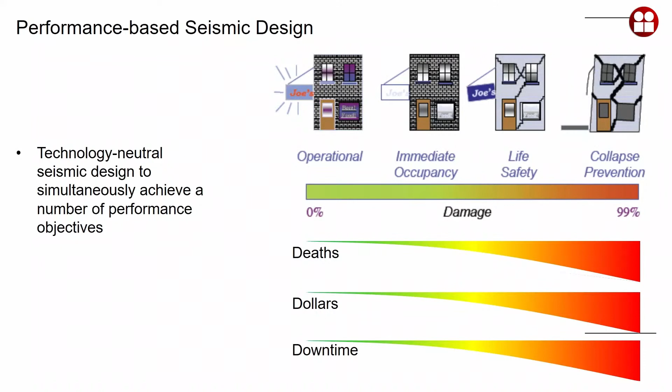And the downtime of the facilities that happens after an earthquake, depending on the amount of damage that we have seen.

And this Vision 2000 format of multiple performance objectives associated with a hazard level, frequent, expected, design level, or rare, with the performance objectives that are...

Here only four of them, in terms of operational, immediate occupancy, life safety, and collapse prevention, has taken hold in much of the prototypical performance-based design provisions.

And the ones that are now being implemented, perhaps there are one limit state fewer and one hazard level fewer, but this is how things have gone in the past.

And we are in the situation now that when we design, we look still at the demand and capacity comparison. We take input in terms of limit states, in terms of hazard.

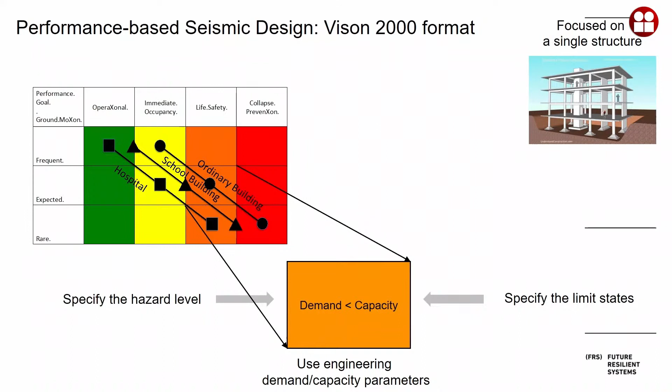We use engineering demand parameters. These are drifts or forces to evaluate the structure and figure out if it's good or not, and then iterate also in the design process.

PEER, the Pacific Earthquake Engineering Research Center, where I happened to work in the early 2000s when the center was going strong, developed this performance-based earthquake engineering framework that has to do with dividing the problem of computing the total probability of a loss into several stages using the total probability theorem.

The first stage is, of course, the hazard. Then we have to do some structural analysis, figure out what is the consequential amount of drift or force in the structure. Based on that and some test experience, or really good models, we do damage analysis and assess the damage state of the structure. When we are done with that, we can figure out how much it costs or if anybody is going to die, if there's going to be a collapse or not.

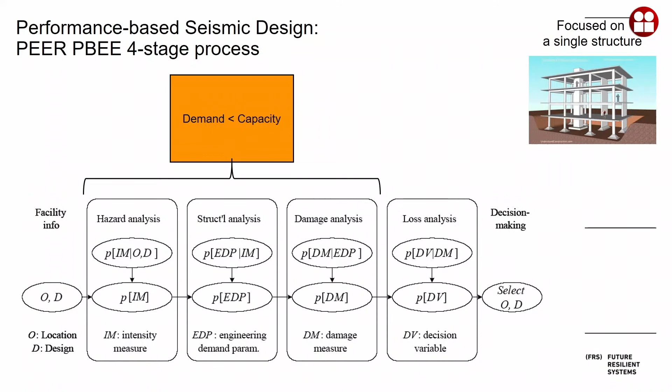This kind of 4-stage process has also been accepted in our profession and is entering ASCE 7, the modern codes, the FEMA P-58 entire system of manuals has been built around this idea. The more modern retrofit codes like ASCE 41 or the Swiss 269 are also looking into this idea and accepting it.

Why is that so? Because it works. It's easy to choose examples in Mexico City because there are earthquakes, big ones. Comparing 1985 and 2017, there were collapses in both, but many, many more in 1985. So many more people died.

The changes in the code that Professor Alcocer also wrote about, and the evolution of the code in terms of the spectrum shape, in terms of the requirement for thicknesses and strengths, have shown to work. They don't prevent collapses completely. Probabilistically, that's a little hard to do given the uncertainties we have, but they make them fewer, so we don't have as many casualties.

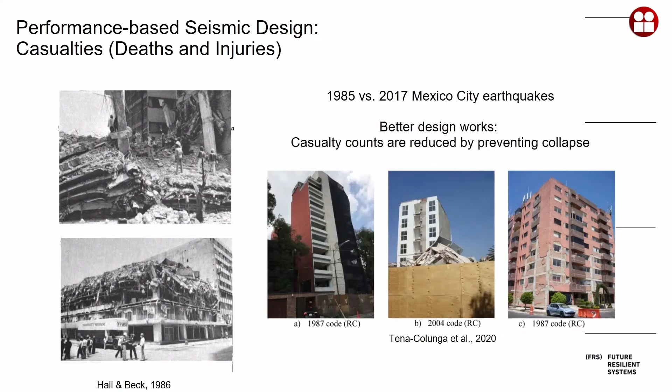Now, the economic damage is a different story. It's a very different story, and here this is a huge city, so it may not have been felt as much as in Christchurch. This is, of course, the New Zealand 2011-12 series, where they were basically left without their central business district in their downtown.

That meant that people couldn't go there to work, offices, small businesses, and it was cordoned off for, I think, 2 years. In the meantime, they decided to make a whole new urban plan for that area, further delaying the resumption of business.

This involves not only direct losses in terms of the rebuilding or repairing of the structures that they want to do, but indirect losses in terms of economic numbers, in terms of later on people emigrating out of New Zealand or out of that part of New Zealand to find work, are also to be accounted for.

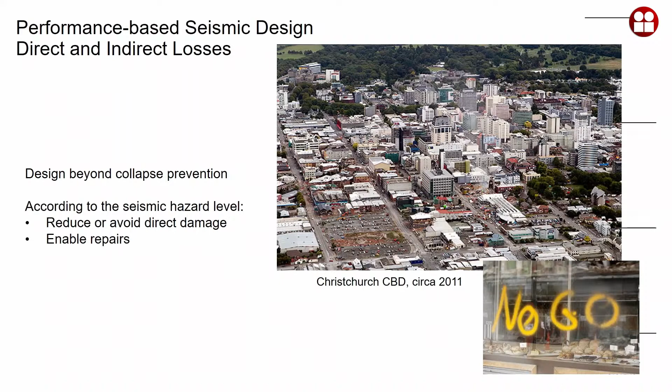What performance-based engineering does is it enables us to consider multiple limit states, the ones that have to do with the reduction of direct damage and with enabling repairs. This repairability is becoming quite an interesting option.

In many talks recently that I've seen, Professor Ken Elwood gave a keynote lecture at the American National Conference for Earthquake Engineering last year, with the title—in the title there was something about repairability, so go take a look at that. That's on EERI's website. That was an interesting talk.

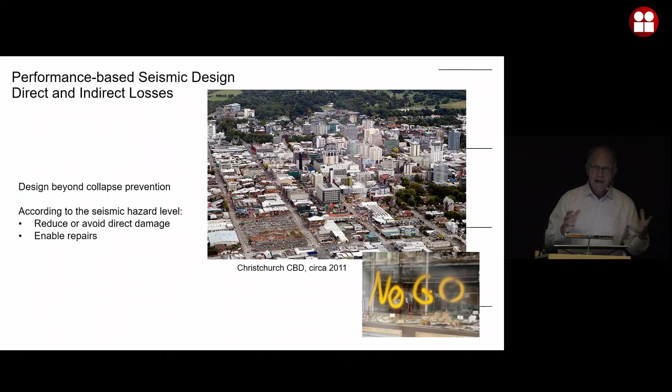So let's see if I skipped.

But the result of this effort is this FEMA P-58 framework, which extends in some sense, or elaborates on the PEER framework, and lets us figure out how things rank in terms of the casualty risk, in terms of the risk of it being black, green, yellow, or red, in terms of the cost of the repairs, cost of the initial build, the time to repair, and towards the end is also carbon.

That's new. But there is this comparison of different structures. As you go from the bottom, these are the unretrofitted, old, non-ductile structures—lots of casualties, probably going to be tagged red, long repair times. They're cheap, but they cost a lot to repair. And you go up towards seismically isolated structures with the usual conclusion.

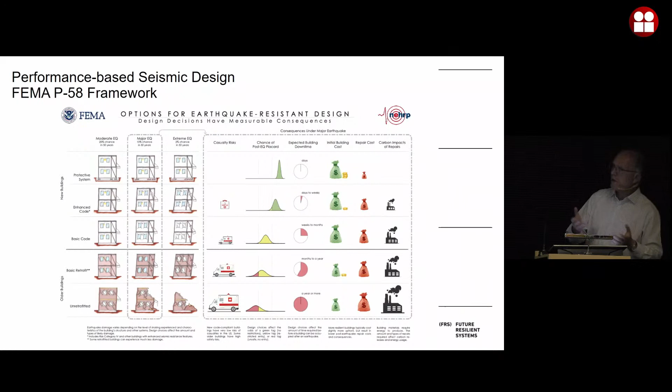So this framework is quite interesting, but the recovery of the businesses, the recovery of the life of that community, even simply the evacuation and the return of the population are not easily described only in terms of repairs of individual buildings. They have to do with their function. So the notion of functional recovery is higher, bigger than repairability.

It is not only restoring the structural integrity of the building, but also the lights, the air conditioning, the internet, the water, the transport to the building—everything that makes this complex building work.

I can see that it's easier to do so for an individual house, but even today individual houses are not as simple as before, especially when it comes to office buildings or schools. So functional recovery becomes a new dimension in terms of seismic performance. There is a recent document by the American ERI that advocates introduction of functional recovery into the process.

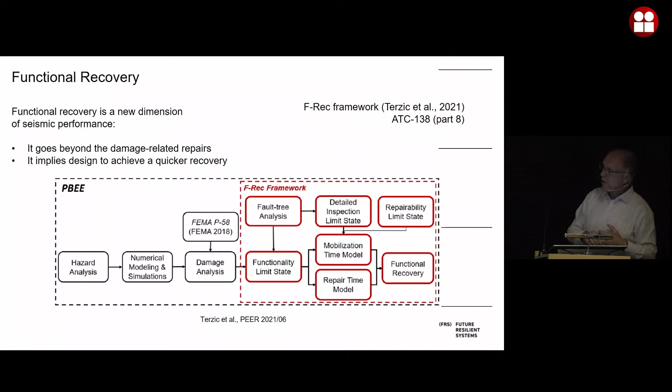What I'm going to start talking about now is something newer, this red block. It is the functional recovery, or F-Rec framework, proposed by Vesna Terzic, and also, a bit later but in parallel, the work of the ATC 138 committee. Essentially, they start with a performance-based framework, look at damage, conduct damage analysis, and then move on to figuring out how to restore functionality.

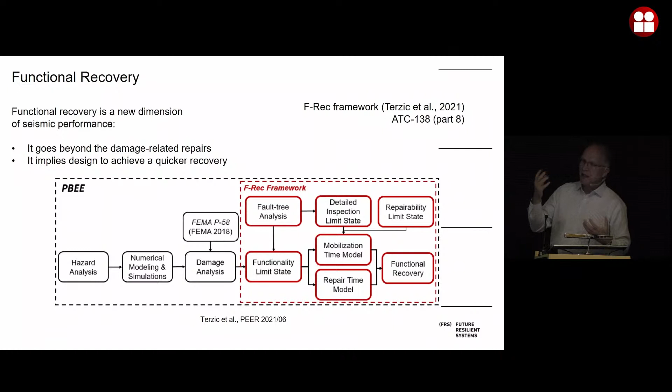What does it take to fix the doors, elevators, air conditioning, power, water, and everything else the building has, in terms of the relation between these functional limit states and structural damage states.

To remind you, the way the steel fractures were discovered after the Northridge earthquake was when, in one simple office building, I think 6-7 stories tall, they couldn't get the elevators to work. On the outside the building looked okay, a few broken windows inside, nothing major. They just couldn't get the elevators to work. Then they measured the inclination of the elevator rail and found it was about 2% off.

They looked into why the entire building was tilting. They opened up one of the connections and saw the picture we all know, a broken column. That building basically raised the alarm, and the way it was discovered is because it functionally couldn't get back to where it needs to be.

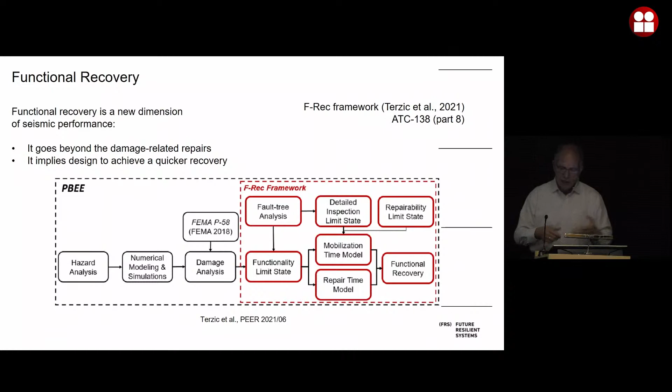Once you figure out what needs to be done with the function, you can then plan the recovery effort through the mobilization phase: starting the work, designing, permitting, getting resources, contracting it out, and the repair model. Then you can get the functional recovery estimates.

The way things seem to be going very shortly, with the publication of the ATC 138 document or Vesna's PEER report, 2021/6 - that's easy to download. Her papers also, but they're all listed there.

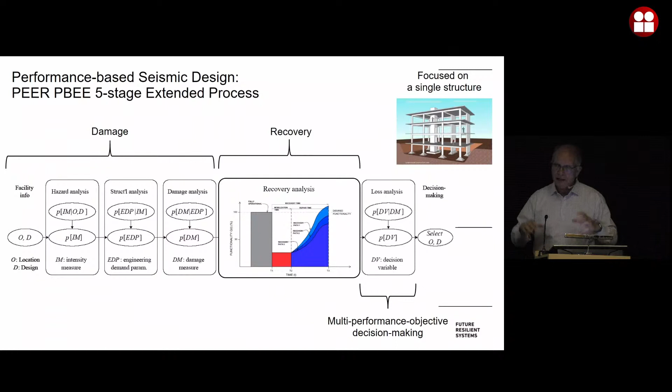I can see that we're going to divide the PEER methodology a little bit, keeping the damage analysis on the left and the loss analysis on the right, and adding this recovery analysis in the middle. This means we're now going to be able to much more accurately compute the downtime and the direct cost, in terms of the effect an earthquake had on a building.

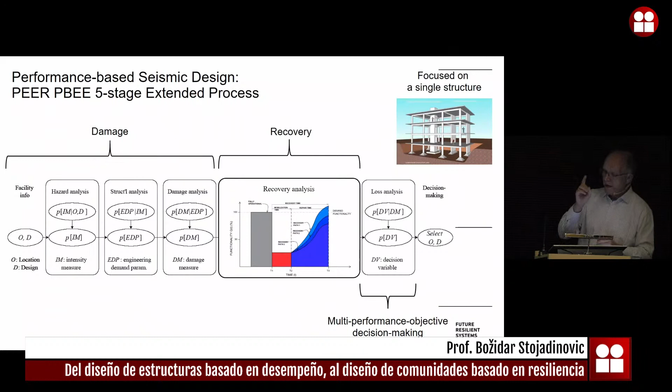Unfortunately, there is one thing: recovering the building's function, its power, water, transport access, and communication needs the rest of the infrastructure to be recovered too. It cannot stand alone. Some hospitals have powerful enough generators and big tanks to sustain themselves for a few days, and water also, but that's it.

So we're not talking about long survivability off the grid. We need recovery of other structures, and that now has to do with regional risk exposure, all of them together. We have to have recovery of the technical side of the infrastructure systems.

Finally, people need to be able to come back into those buildings. They need to want to come back. First, they need to feel safe. Example from Turkey: a seismically isolated hospital, for some reason we can discuss, had quite a bit of non-structural damage on the first floor—basically the light ceilings fell down. The doctors wouldn't go in, the patients wouldn't go in, even though it's a seismically isolated hospital, which cannot be better. So there is the psychological aspect, and also the economic and all the other things that build this society.

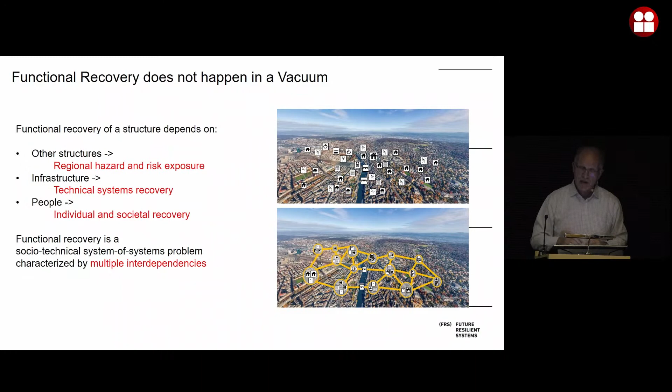So all these are heavily interdependent when you start looking at the region and identify the houses and the power lines, then try to group them somehow and see how those networks work. These interdependencies are very difficult to untangle, but here is an example.

When you have casualties and injuries, that overloads the emergency services and hospitals, and housing damage creates demand for temporary housing, and you want to start repairing—that's a lot of people and bricks that need to be delivered. When there is no housing, people aren't there, and the power and water systems don't have as much demand as before, so it may not be all that bad. However, infrastructure is also damaged, and we don't know if the available capacity will satisfy the reduced demand or not.

These are instabilities in the entire system that make people uncomfortable, and they may decide to leave—which, at least from the data from Turkey, that region had about 15 million people, and 3 million left.

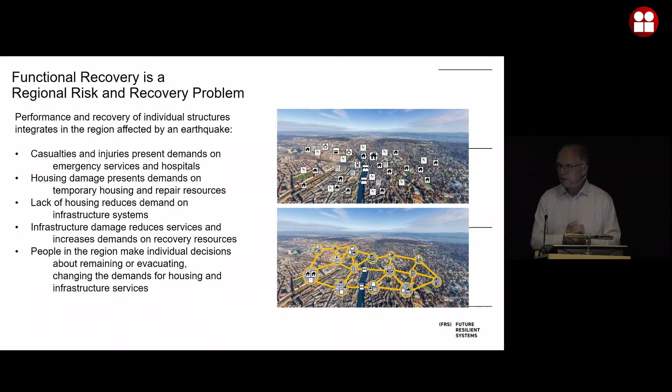They're not in their houses anymore. It is estimated that maybe 1 million are in tents, 2 million are somewhere else in Turkey. This is a shift that may be permanent if the children of those people start going to these other schools. If they find jobs somewhere else, they're not coming back. So this is a complicated problem.

And how do we technically look at this? We can start estimating the hazard, the exposure of a region. We can look at the regional hazard or the intensity maps for an earthquake that this region may see. Then, looking at multiple buildings there, we can identify the classes that they belong to, and within those classes, the vulnerabilities that they have. We can also look at the occupancy and the functions that the buildings have right now to assess the damage. Then, when it starts with damage, we can see how much it takes to repair that, what are the resources, how much material and manpower and machines do we need.

And then from the functional recoverability side, we now have a pretty good handle with those frameworks, the F-Rec and ATC 138, on what it takes to recover the internal functions of a building once its structural stability is there. And then only then can we talk about the restart of functions and the reoccupation of those buildings.

So it's a very long list of things that need to be done, and especially long when one considers that now you have to know this: intensity of the ground motion, vulnerability of the structure, occupancy, current function, damage state, repair of that, recovery of function, and reintroduction of people, not for one building, for let's say 50,000. Here in Mexico City, maybe 1 million. And I mean, how do you do this?

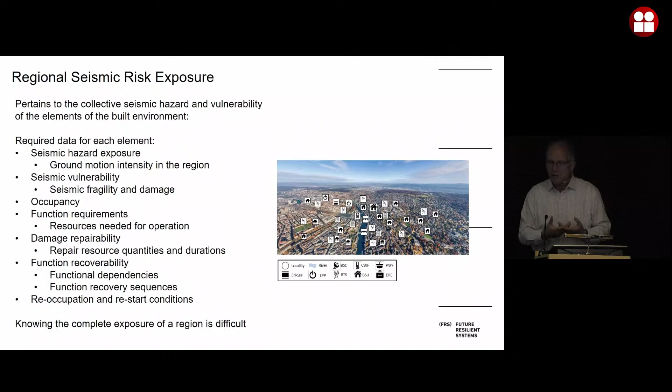You have to do it statistically. You have to, right now, it may be possible with bigger than big data that we have today to capture this individually, if people were ready also to surrender quite a bit of their privacy in terms of location and in terms of the quality of the building that they live in, and so on and so forth. But now we can do it statistically, and that's probably the best we can do.

And with the F-Rec framework, we can see how to recover individual buildings, and typically we would come up with this kind of a flow chart as to what happens when the repair starts. First you do the structural systems and the vertical systems like the stairs and the elevators, and once you enable the people to go up in the building and bring doors and windows, for example, then you start repairing partition walls, pipes, HVAC, and all this other thing. So there is a sequence to how things go.

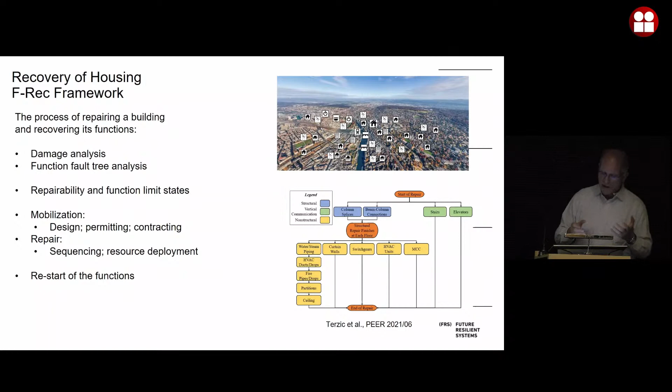And this is now to be repeated everywhere in the region for every one of those buildings. And what you get for a single building is something like this. This is an example of a 42-story tall building. That comes from other studies in LA, but as you go up, you see the Gantt charts. So you see how some pieces of work start. The blue are structural repairs, and the other ones are non-structural repairs. And you see the delays as you go up the building.

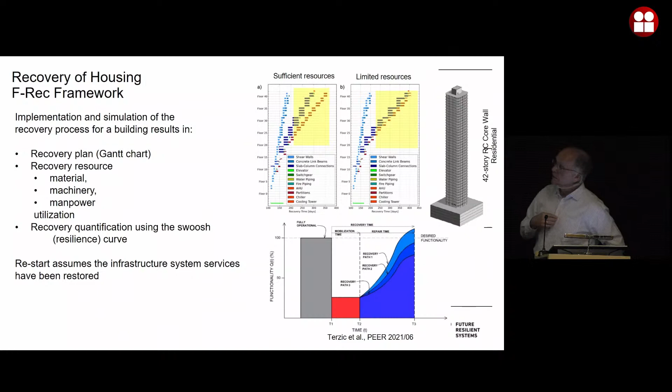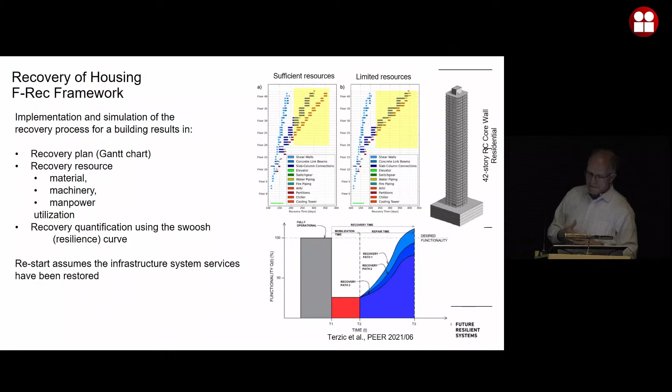And with limited resources, if you do not have, for example, enough people, then there will be further delays, and you can then plot and chart these kinds of resilience curves, the swoosh-like curves that have a drop in functionality, this red region of just preparing to do repairs. For a 42-story building, you're not going to run in and do it right away. You have to plan, and then start gradually going floor by floor up the building and repairing things. And so this is what that framework gives us.

But regionally, in terms of infrastructure, we need similar frameworks too. And there are a few, and the one that I'm going to tell you about is this iRe-CoDeS framework that my students have developed over time, that we're also now working on in Singapore too. There are others. INCORE is another one. This is the Resilience Center funded by the American NIST, the National Institute of Standards, in Colorado State. John van de Lindt is leading it. They have a very nice framework.

Several other researchers, like Professor Cimellaro from Torino, have a nice framework of their own that started when he was in Buffalo, a student, way back when, with Professor Reinhorn and Bruneau. But the idea is that we want to be able to simulate the operation of the infrastructure systems as it is being vulnerable and damaged and as it recovers.

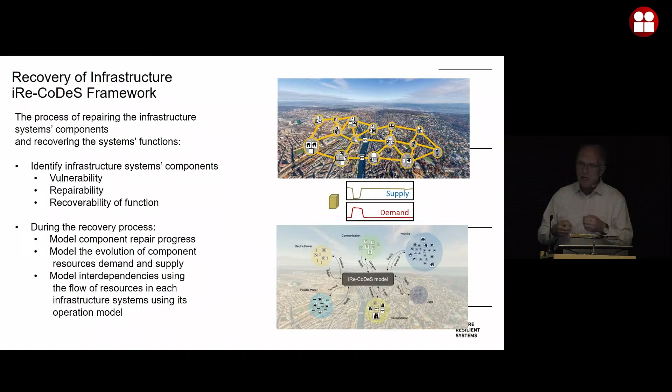So we model the individual components of each infrastructure system. We lump them a little bit together into localities, so we don't have to analyze every pipe, but some connections we do analyze, and then look at the supply and demand of those components. Why is this important? It is very difficult to exactly chart out how an infrastructure system is going to work in the damaged state, where the water may come from or the power may come from in a multiply connected building.

Singly connected buildings, okay. But in that sense, looking at the supply and demand, what does this water pump need to operate? It needs water to pump and power to work. So if it doesn't have power, it may be in super good state, no damage whatsoever, has all the water coming into it, it still cannot work. So these kinds of interdependencies we can capture by listing the multiple supplies and multiple demands that a component needs.

So a component has some damage, has some repair scheduling, and during that repair scheduling, we look at the list of demand supplies that it needs, power, water, communication, and whatever that component produces for the infrastructure system, and then balance the entire infrastructure system using this idea of flows through the system. And so this helps us capture interdependencies very, very well. Other frameworks also do it.

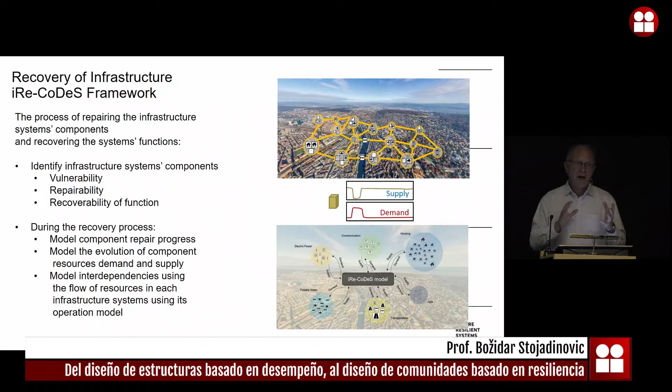They often use optimization. You will see we use optimization too, because in this iRe-CoDeS framework, we predetermined the sequence of component repair. For example, biggest pump first. Or we also predetermined what the next repair is going to be, and also how to distribute the resources within the region. You can direct the resources to the hospital deliberately, for example.

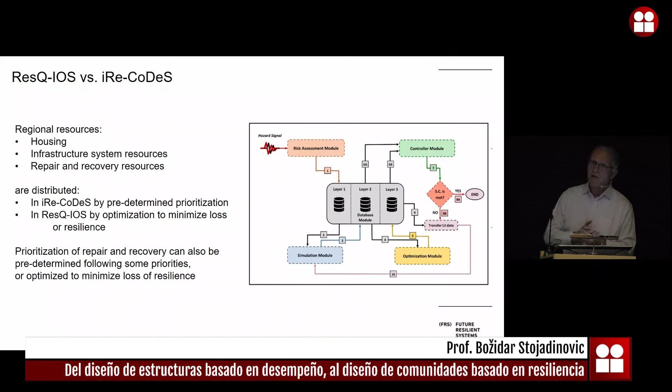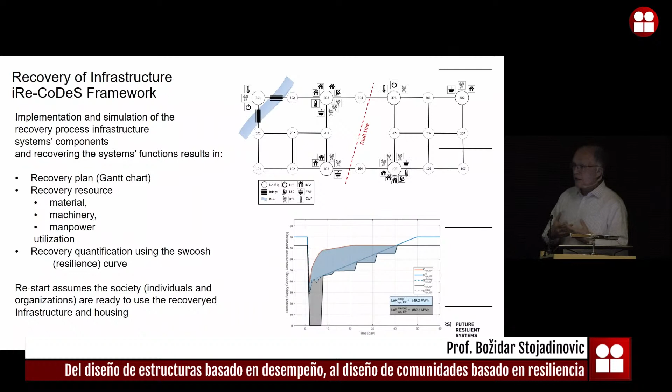And this gray area on the bottom is caused by interdependencies. It is this additional loss of resilience that happens. And so we can capture that with this iRe-CoDeS framework, and it works now quite well. There is a Python version that can run on a parallel machine. We can do many analyses of the same region for a random fault and random vulnerability of components, and even some randomness in how they recover. So it is possible to probabilistically characterize the technical side of the system.

But the technical side of the system is not the whole thing. When we recover structural safety, when we even recover function of a building or of a part of an infrastructure system, it is up to the people to start using it again. And the people may not feel safe. The people may not be there. The people may not be ready.

In Turkey, for example, the day after the earthquake, the waterworks that has about 1,500 people working there had only 200 repair people show up. The rest, some were dead, but many were busy with their families who didn't have a roof over their head at that time. So even though you're ready to go, you cannot, because the people are not back. And how do you capture this? We are engineers, and we can do all the numbers that you all know, and maybe even more. But this doesn't help us understand the behavior of the people who are users of our system. And this is a big problem.

And a large field of resilience studies that started after Hurricane Katrina has been very focused on this psychological and societal resilience of an individual and resilience of groups of people. And they do a lot of work through indicators. They survey people before and after. They have this idea of social capital, connectivity, bonding, bridging, linking among people that helps them survive a disaster.

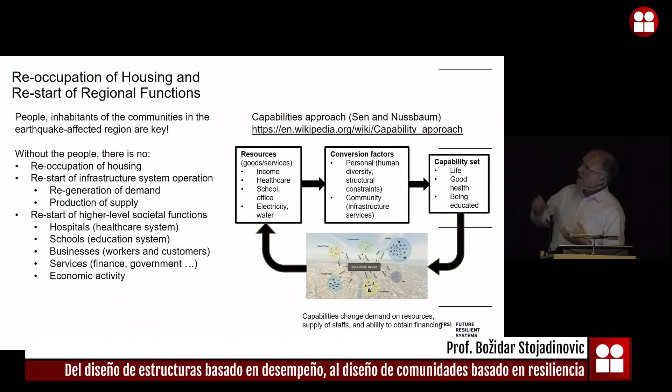The curved arrows show how the capability set will provide more resources for recovery of a community, and therefore the electricity and power and all this is going to be improved, coming back with more conversion factors, enabling more capabilities, more people being able to realize their desires, and so on. And that would be a recovery that circles in this cycle and helps the system build up, and also integrates from a person to a group.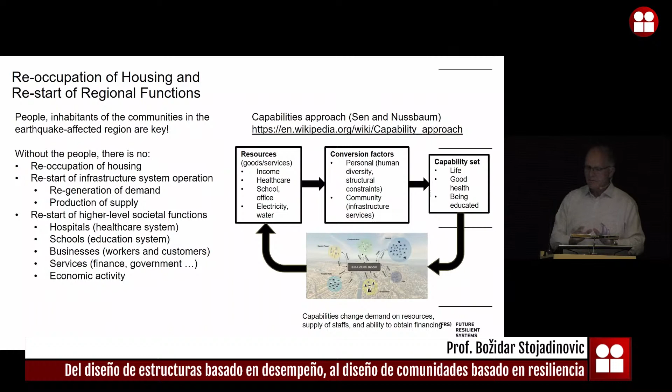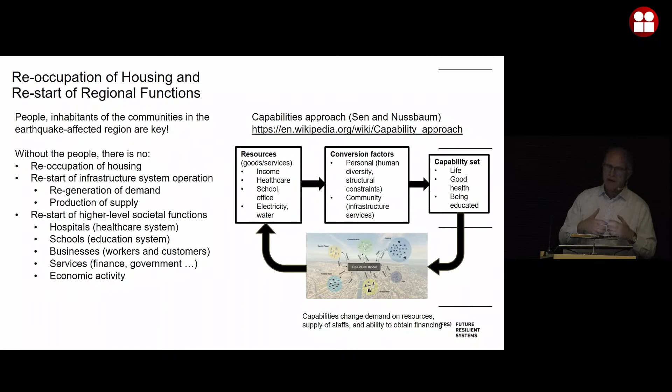So this is still being worked on. Lawrence, the doctoral student at ETH in Singapore, is doing this. But this is something that also Professor Gardoni looked at with Colleen Murphy, another professor from Illinois, some 10 years ago. But they stopped at just the damage state. But we try to push it towards recovery.

And the reason why it's important is because we are dealing with a socio-technical system. It's a system that has the technical part, the bottom part, that we handle. And the top part, the societal part, and in this middle, we hope to insert this capability approach with resources, conversion factors, and a capability set that enables people to do things. And we will see how it will go.

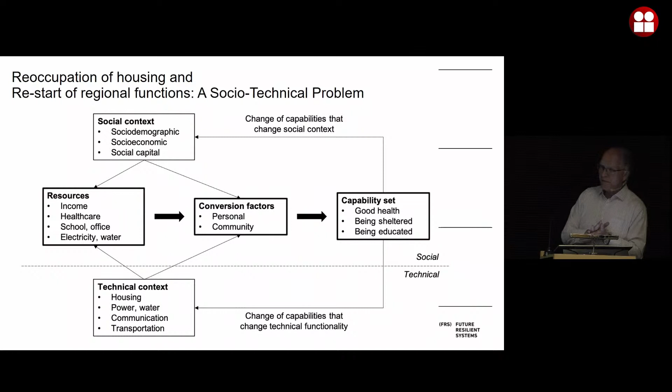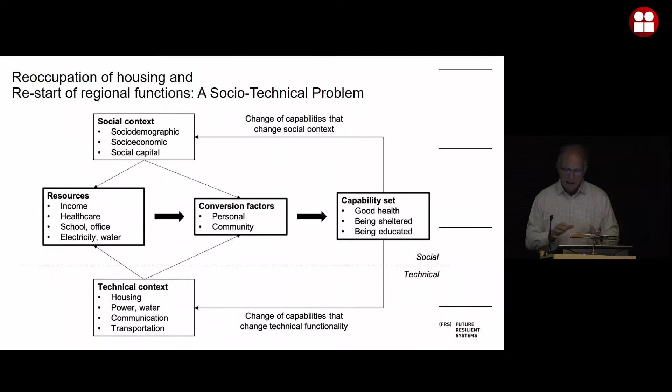But the socio-technical aspect of recovery and resilience is something that I think we need as a group of engineers to work on very hard, because the technical part, I feel we are not very far from being done, at least conceptually, of how to evaluate it. And this would be a good extension. At least that's what I'm going to try to do next.

But to come back to the technical part, here is an approach that we tried, and it does work, of how to do regional recovery simulations, regional resilience simulations. And this is a combination of this F-Rec framework, N times for every typical building in the region, and the iRe-CoDeS framework that does infrastructure recovery. And so conceptually, you start with every building, you get their damage states, you also do that for infrastructure systems, and then once you have building level functional recovery requirements, you do an infrastructure system analysis and see how far off that is and how much delay you have.

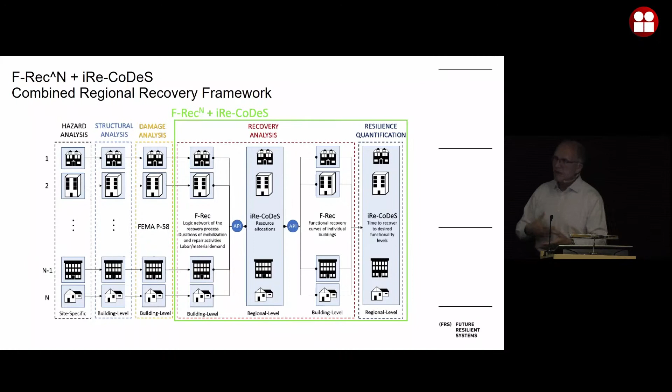And do a resilience quantification at the first time step, then repeat the next time step, the next time step, the next time step, as those Gantt charts grow and buildings recover function, infrastructure recovers function, and eventually the entire region recovers function. So here is a picture of how it works.

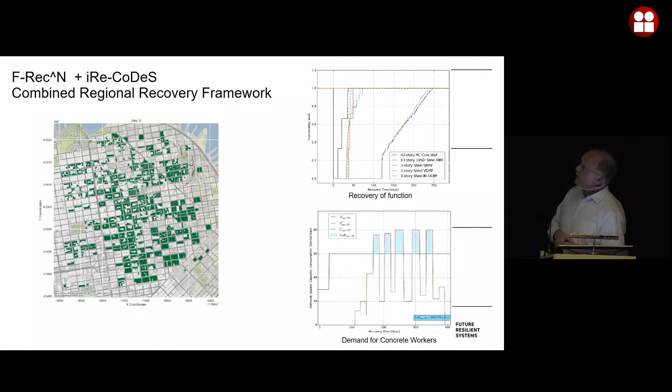In downtown San Francisco, we picked about 700 buildings for a hypothetical earthquake, not really a weaker earthquake, but a likely one. And the graphs above show you the recovery of the function in 3-story, 13-story, and 42-story buildings. And those are not hand-drawn swoosh curves, but generated stepwise curves that show how repair progresses. And you see the blue one has a lot of steps because that is the 42-story building that needs 42 steps to recover.

The bottom graph is also interesting. It shows when there is a shortage of concrete workers, people who do forms and pour concrete. And depending on the dynamics of the recovery in the region, you may or may not have enough. And this is going to slow you down. Or if you can provide more people, it costs you more, because at some points in time, you do not need many concrete workers. So this gives you a way of dynamically scheduling regionally the work.

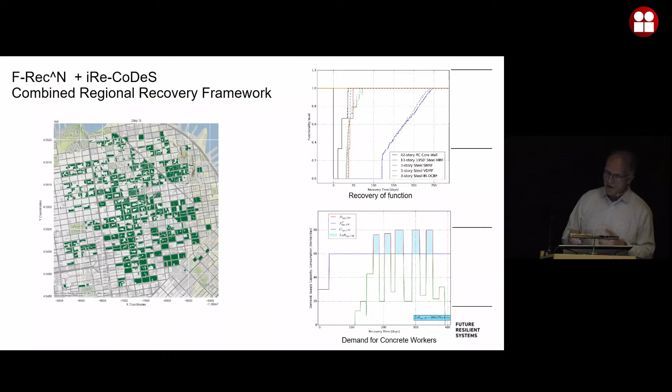So if you go back to what we did with the PEER methodology and that framework that had 4 steps and then the recovery, we can do the same on the regional level. We can say, okay, we do the hazard regionally, we do vulnerability regionally, we do recovery regionally with this F-Rec and iRe-CoDeS combination, and we quantify resilience.

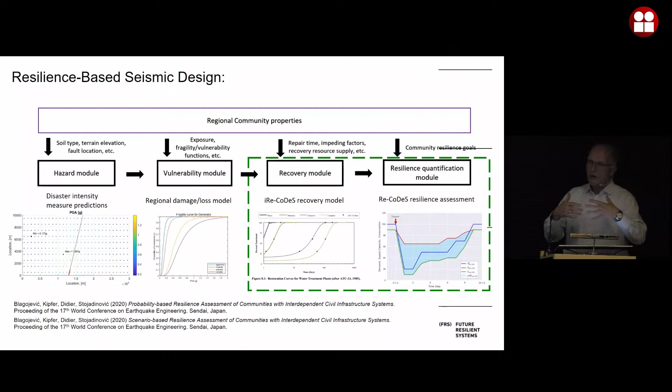So what I want to show you by this slide is that it was a conceptual step forward from performance-based design for individual buildings with some assumptions, quite a lot of integration, quite a lot of computation. We moved towards regional assessment of all of them together. And not only that, since we can now track over time how recovery goes, we can reconstruct those resilience curves and quantify resilience. So this is the fundamental step in going from performance-based design for single structures to recovery-based design, resilience-based design for a region.

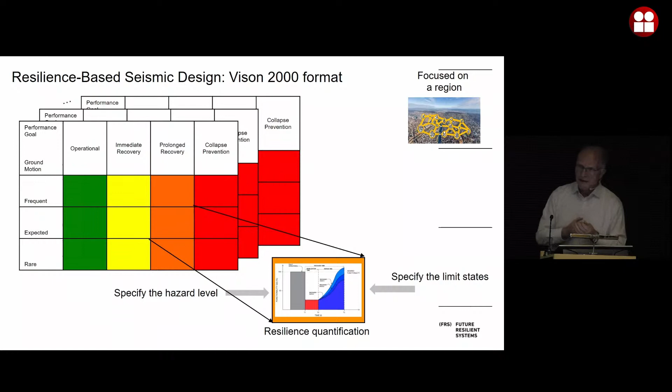So if everything goes well, we may be able to do a Vision 2000 format, but for resilience, to have some hazard levels and a bunch of performance level objectives, operational or collapsed, communities collapsed when people moved out, and do that for all the infrastructure systems, healthcare system, school system, small businesses in the region. And each one of the blocks we can now quantify how resilient or not resilient it is, how quickly it recovers and how slowly it recovers.

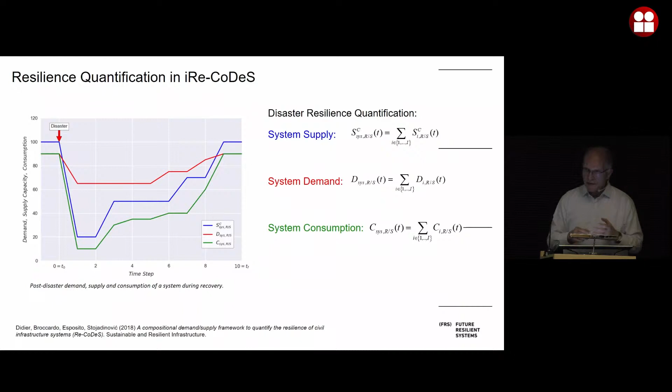And so in the iRe-CoDeS, here is how we do this. We look at the supply for a certain resource, say power, and we look at the demand as it changes. Both change in an earthquake. Both drop initially. Here the demand happens to recover quicker, has a smaller drop and recovers quicker than supply. And the area in between, well, I'll get to the area in between. The green line is the overall consumption of that resource. So even though you have some supply and you have some demand, your consumption is lagging yet because there is no connectivity in this particular illustration.

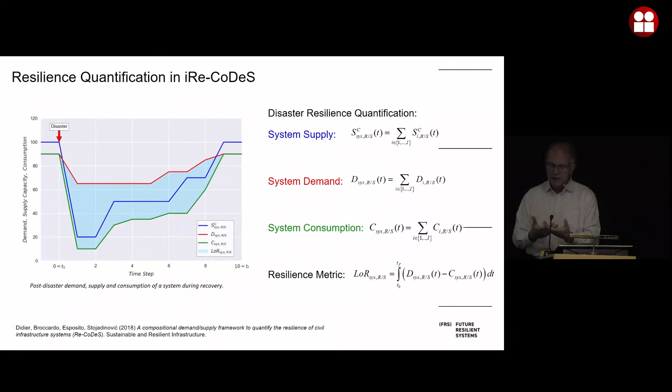So when we look at the resilience metric, which is this area between the system demand and what the system consumes, this is what we term lack of resilience. This is the area that originally in MCEER, in that paper whose first author is Michel Bruneau, but it is the entire center who took part in formulating, was all the way to the top of the graph, looking only at the supply. Here we note that the demand changes too, the consumption changes too, and we see that lack of resilience is the difference between what people would want to spend, use, consume, and what they really consume, and how that recovers.

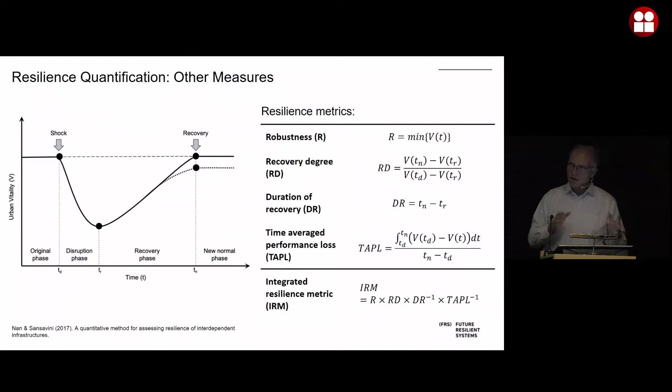There are other measures that characterize the swooshiness of this curve. The first derivative when it drops, the first derivative when it recovers, the robustness is some kind of a minimum drop, the smallest drop that it has overall to the minimum point. The area this time averaged performance loss is a normalized area, and so on. And there are even proposals for a multiplicative index. But what I want to focus on is this duration of recovery. Duration of recovery is just the time distance from the event until you come back.

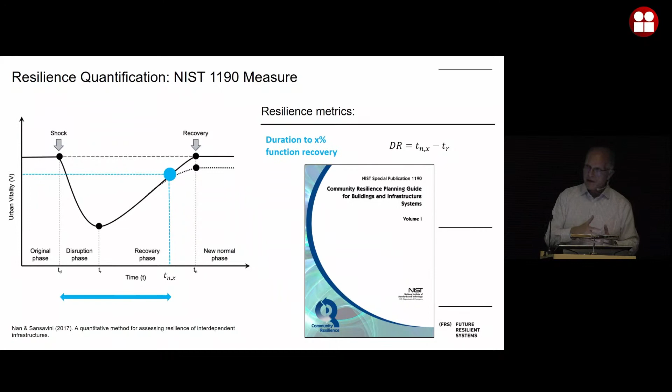And this is something that NIST, the American Institute for Standards, has taken on as the key measure. It's a simple measure. But they published a document 2 years ago, this NIST 1190, which again you can download easily. And there the duration to X% recovery is the key metric. So what X is varies, and the duration, of course, then varies depending on this resilience curve, on the swoosh curve. And then they said, okay, what is acceptable? What could be acceptable? This example stems from San Francisco downtown being hit by a 1906-like earthquake. So it's not general, but the format is general.

So they say, okay, critical facilities are buildings, transportation system, water, communications, and they want 90% recovery in short term, which is a few days. And the X's are where they think the systems are now. So there is quite a large time gap between what's desired, the green squares, and the blue squares. And then they go down into emergency housing, a little bit longer to recover, normal housing, and then finally community recovery. So there is a little bit of a shift in these graphs.

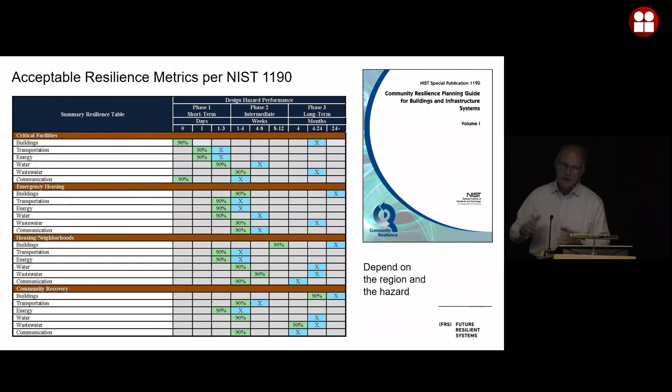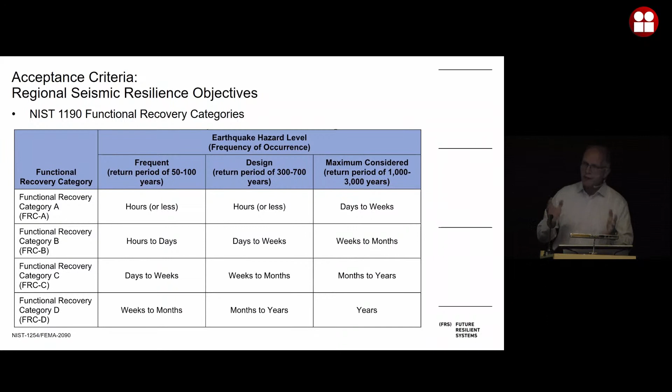And generally, the format of the acceptance criteria has to do with functional recovery categories that are defined in this document, and the frequency of an event. The frequent earthquake, design level, expected earthquake, and maximum considered earthquake. And you see the blocks are how many days or weeks or months, hours or days are needed to recover. So before we were thinking of the performance objectives, expected earthquake, immediate occupancy. Now we think expected earthquake for functional recovery A, hours or less for full functional recovery, or 90% functional recovery, depending on the particular region, particular code, particular hazard. So this is the format of those acceptance criteria.

And over time, I have been pushing students, and they have been doing a really good job, to match exactly this need with the recovery in terms of this area between the demand and the consumption. We can note when this 90% or X% point comes in.

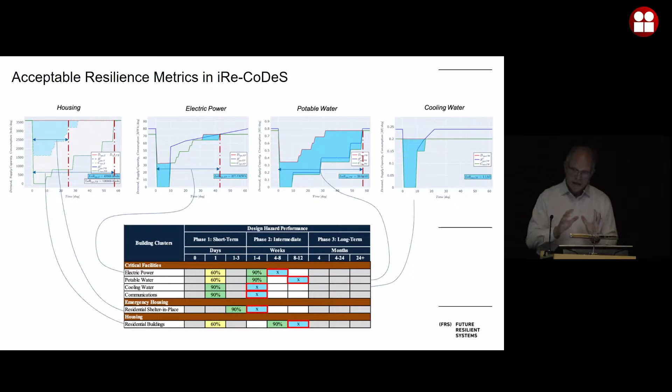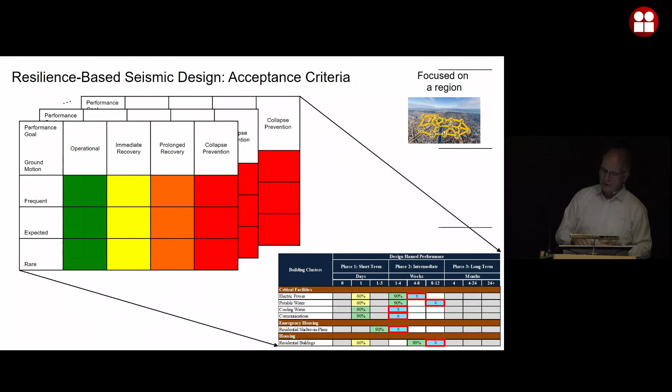So these are all building blocks of performance resilience-based design in this Vision 2000 format, where now the squares for every infrastructure system would be explained in this NIST 1190 format. So in that sense, we can do a lot. We can do one more thing. We can see how to affect resilience of a region. Just to put it very simply, this is a separate presentation altogether.

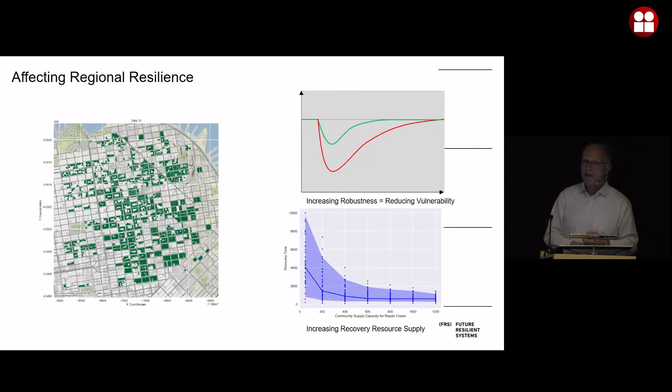But if you are low on resources, your recovery time is going to be long and your uncertainty is going to be high. So bad and then double bad. And having these tools, we can then say, okay, fine. We can put together a design flowchart for resilience-based design. And it is the same design flowchart that we always use.

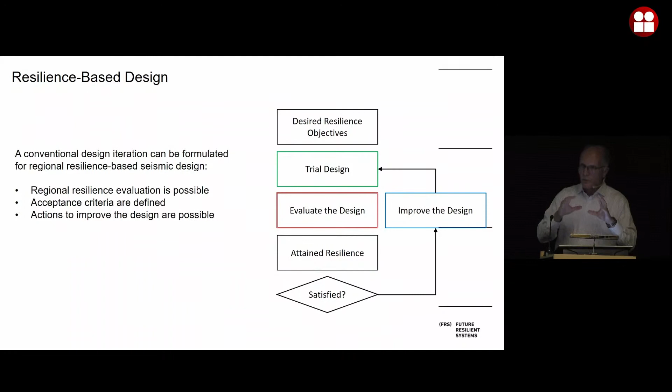We set some objectives. When you design a beam, you don't want deflection to be very large, and you want to carry the load. For performance-based design, there are a few objectives. For resilience-based design, there are many more. We have perhaps a trial design if you're designing something new, or we can evaluate an existing state. And we can ask ourselves, are these resilience objectives attained with this particular situation? And if not, we can improve. We can set measures as to how to improve it. Right now, this is why I think we are very near being able to do resilience-based design.

Here are two opportunities. Many of you may have heard that Jakarta is sinking. This is the capital of Indonesia. And first of all, it's sinking anyway because it's too heavy. The soil is simply bad. And then the water level is rising overall because of climate change. So the government decided to move many government functions into a new capital. And this Nusantara is going to be on Borneo, on a whole different island, and it's an empty field.

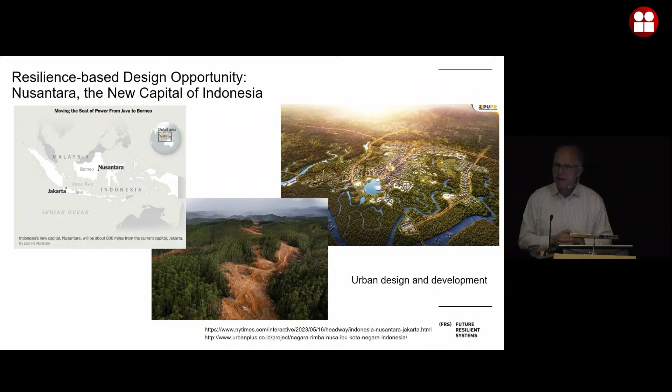And you can see they started digging a little bit. And this is at least the first phase of this future city. Doing resilience for this is just right, because you start at the very beginning, you can test alternatives, you can talk with urban planners, you can do a lot to make it more resilient. But this probably will not happen again in our lifetimes. Much more common is local change.

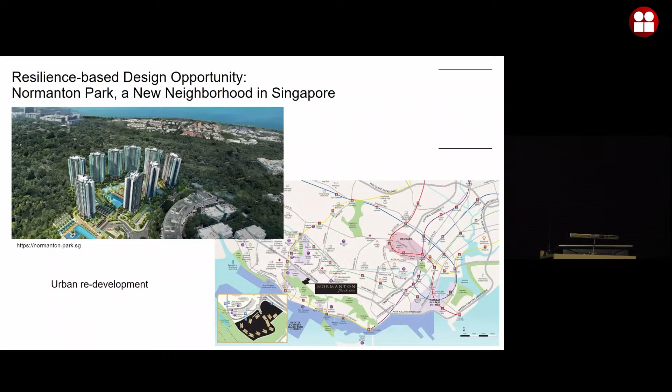This is a small part of the map of Singapore, and down here is the center. This is where all the tall buildings are. This is the marina and these iconic images. And here is the port, and this over here is the new development. And last year when I was there, they were kind of like halfway up to the top of these buildings, but you see there are 40 or so story buildings, a bunch of swimming pools. This is a new town. So every one of these buildings has probably about 5,000 to 6,000 people, 9 of them, 50,000 people. This is a pretty nice neighborhood.

And you can do a resilience analysis of that neighborhood, figure out how much power, water, communication, redundancies, transportation, and all that it needs. How far is it from the hospital? Are these 50,000 people going to overload the nearby university hospital or not, and so on. You can also look at how this addition will affect all the other neighborhoods that are also sourcing from the same source of resources. Schools, for example. How many new schools do you need if you are going to do this? And so this is something that I think is much closer to actually coming about.

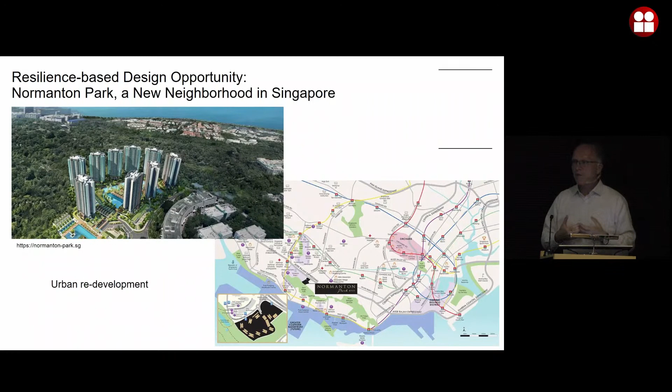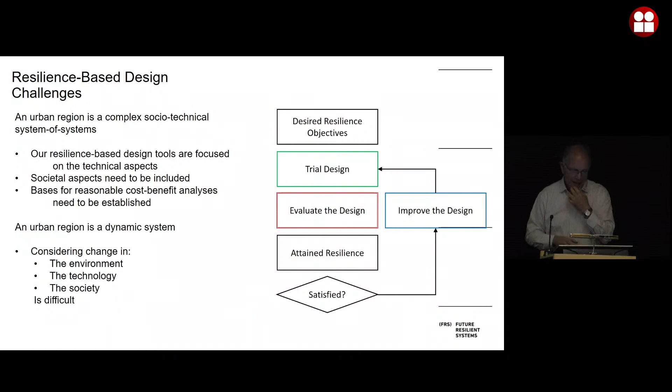And so we have to be able to do this resilience assessment and then collaborate with urban planners and perhaps policymakers, also local governments, to direct their efforts in redeveloping urban areas towards making them more resilient. And we know how, because we have this framework that we can do it with. But there are still many challenges, and we are too focused on technical systems, and hopefully we'll get more societal aspects in there, and also finally the cost-benefit analysis.

This may be the most difficult one because it has to do with the economy, and there are colleagues of mine at the FRS who are trying to tackle that using the input-output table approach. You can Google that, IO table approach. Colleagues in Colorado Boulder at the NIST Center are using the computable general equilibrium of the economy of a region as another way to do this. But those are still quite in their infant stages, and as are the societal aspects, of course.

But I think the biggest problem for us is just change. We are doing this design having in mind a 50-year horizon, a 100-year horizon in terms of hazard, but also in terms of people living there. This neighborhood in Singapore is going to be there for 50 years for sure, if not longer. But in the meantime, we'll have climate change there, everywhere. We'll have technology change.

What is going to happen in Singapore imminently is electric vehicles. In 2030, they will ban import of anything that burns carbon. So the shift of about 1 million vehicles to electric will happen in the next 10, 15 years. That means chargers everywhere, a lot more electric power. The society will change. People will like to do this or that.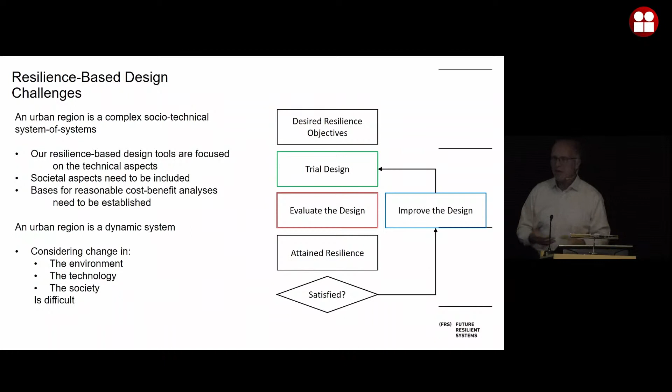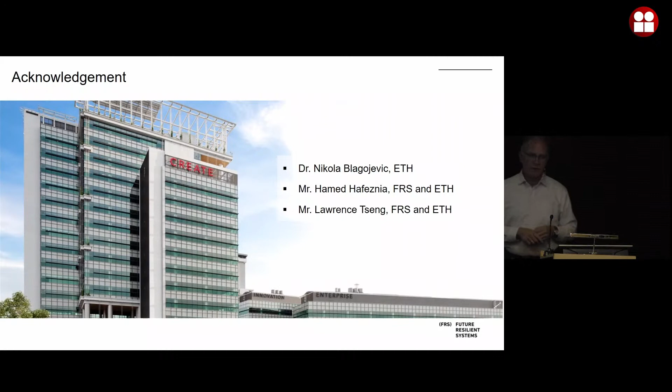And with that, I'll just thank Dr. Nikola Blagojević, who did a lot of work on iRe-CoDeS with several master students, and Mr. Hamed Hafeznia and Mr. Lawrence Tseng, who are now my students in Singapore, with whom I work on these optimization problems and also on this capabilities approach. And so with that, I end. Thank you very much. Thank you.

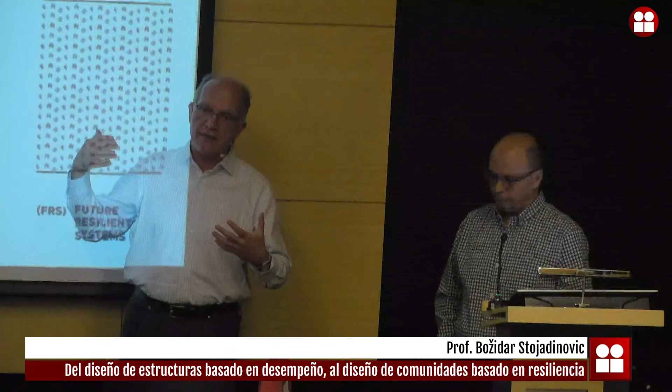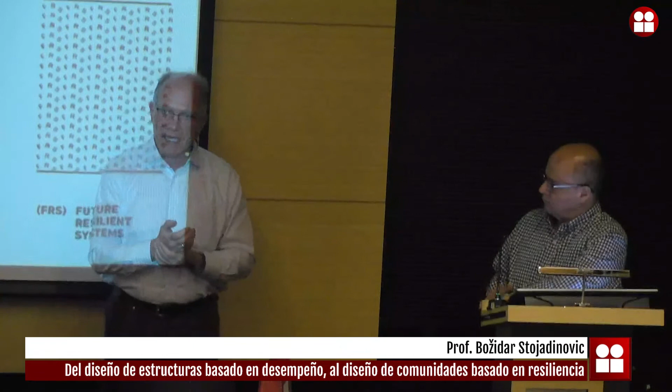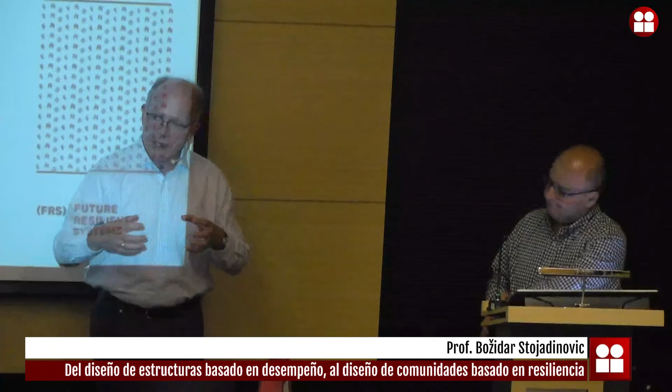In Los Angeles, there was a big campaign led by Craig Davis, who worked for their waterworks, on changing the brittle iron pipe with ductile plastic something - I don't know exactly the name - but a much more deformable, more forgiving pipe that is likely to resist ground motion during an earthquake. So this is an opportunity with infrastructure. While you maintain, you improve robustness, and talk to these people. Many of them are not aware of the hazards that we work with.

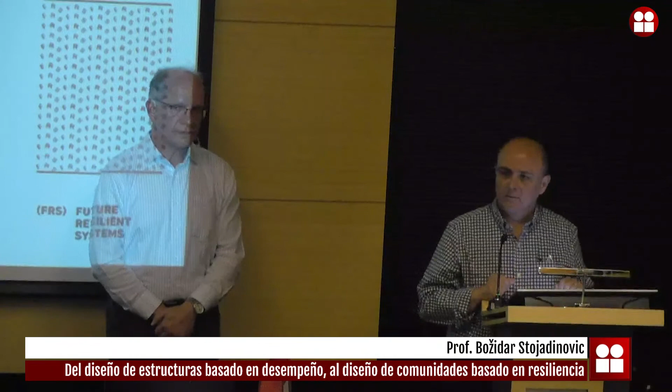Thank you very much for your presentation. I'm very much inspired by the work of Craig on water systems. We are introducing in our research this recovery time. We have two parameters: one is, of course, functionality; the other one is operability. I wonder, have you thought how to introduce this new variable into your concept of resilience of communities?

Because operability, perhaps for a water system, an electric network, even a communication network, could be something more understandable. But when you go to buildings, that creates some problem.

Yeah, we've been working in resilience-based design, where we are introducing in the design the definition of local displacements in the structure, but also the intensity of them. The intensity, because that will really define the recovery time. But for me it's difficult to imagine if I got a crowd of people repairing a certain room of a building, whether it would be operability or functionality, and how you could introduce that.

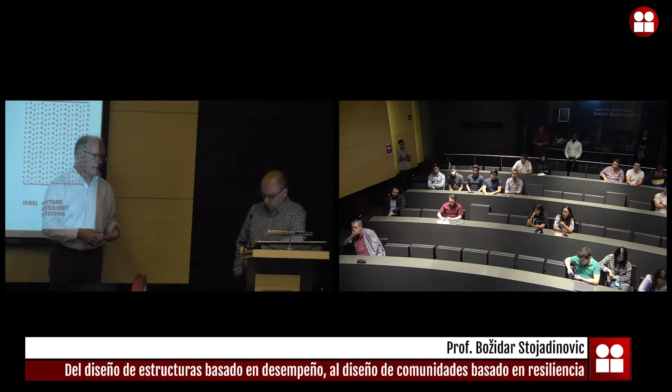Maybe that's too detailed, maybe something more fuzzy can be used. This is a place where we need to invest quite a bit of time. There is also a company by Curt Haselton and Jack Baker, risk something, that makes software SP3 that attempts to do this for a client. An engineer could hire them because of their experience, or interview the specific occupant of that structure. This may be good or bad, we need to learn something new, but it may mean more billable hours for our companies and people.

This problem is something I don't think we can codify with a 0.8 times F prime C type of formula. It is much more complex.

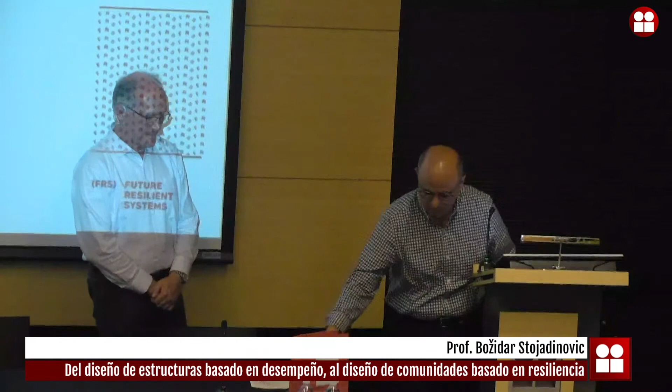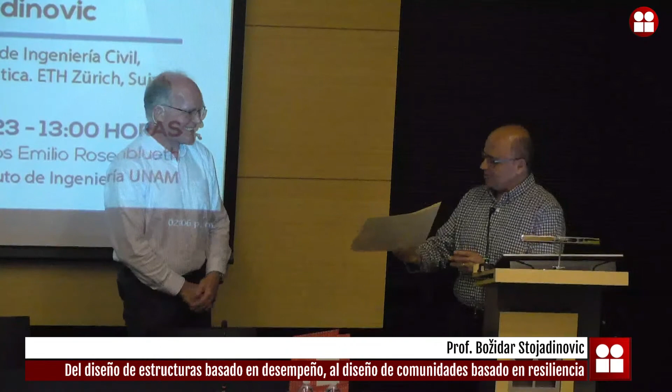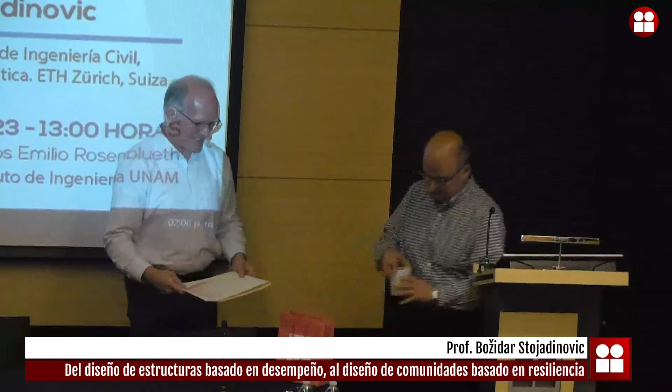And for you, you can take some souvenirs from our institute. There's a cup for coffee or tea or what have you. And we have a resilient instrument so that in case your pen fails, you have an even better resilient pen, you captured carbon inside it. That you're going to capture inside. That is true. Thank you very much. Thank you, and you can take these home. Yeah, thanks, thank you very much for coming. Thank you very much, you're always welcome in Mexico, as always. Thank you so much, and your student too, thank you very much. Thank you, gracias.